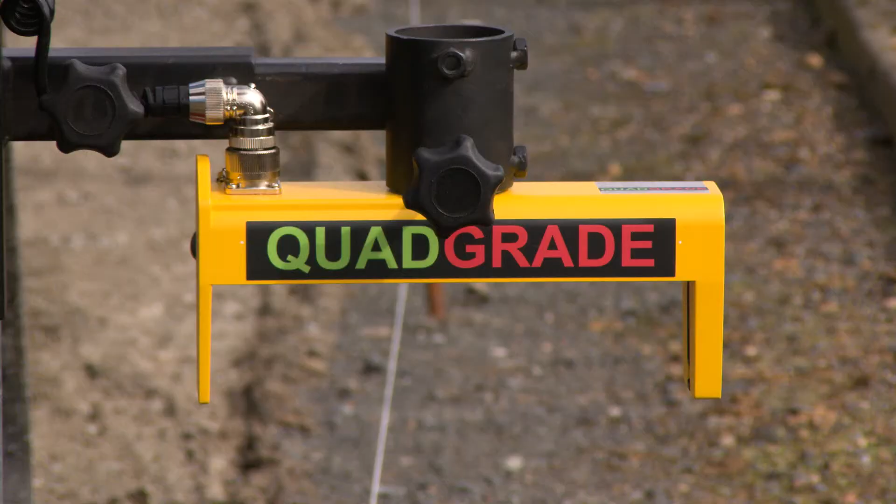Today we're looking at a sonic tracker and what it will do and how to set it up. Here's a sonic tracker, and it's designed for use on string lines or flat surfaces like already graded surfaces, or something like a lip of a curb. So it will set the height or elevation in relation to a string line or a flat surface.

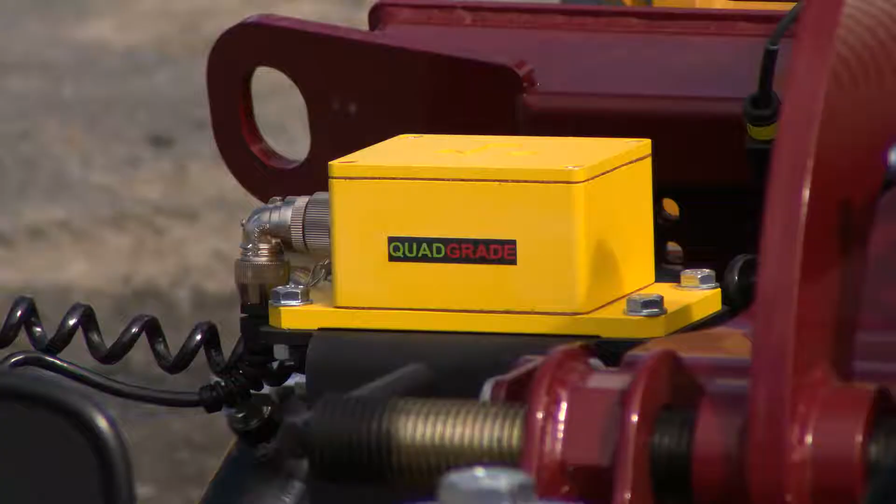And for the crossfall, we utilise a slope sensor. These slope sensors are gyro stabilised, so they're very stable and very quick, much quicker than a lot of others on the market. This allows us to follow a grade a lot more closely. So the slope sensor sets the crossfall, which you can adjust at any time, and the sonic adjusts the elevation. The elevation is adjustable on the screen, on the go, inside the cab.

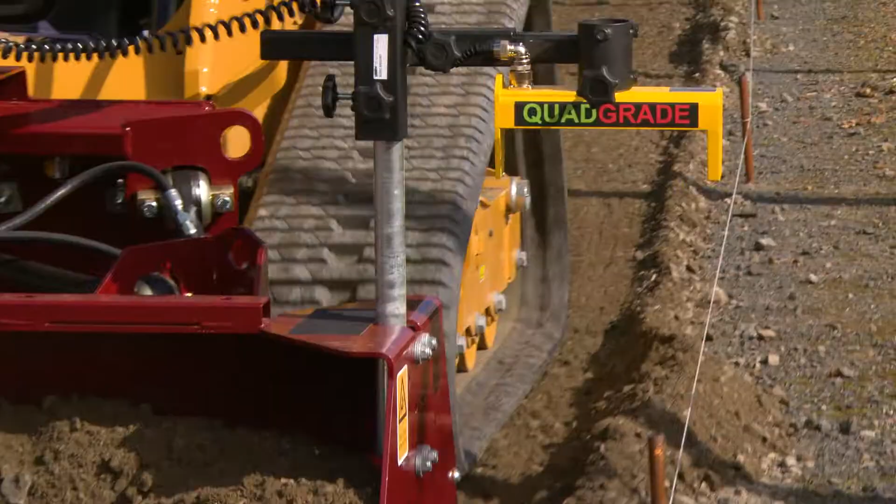So you can grade and alter the elevation up to 600 millimeters, which is 2 feet, on the go. But most of the time you keep it around 300 millimeters or 1 foot. It'll follow a string line or boxing formwork or a graded surface. So we're going to show you how to set it up and how it works.

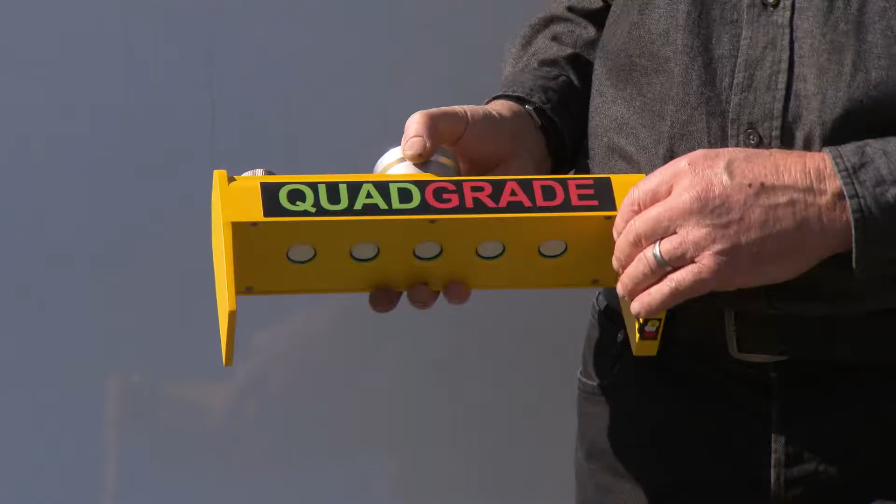What is a sonic tracker? A sonic tracker is an ultrasonic device that uses ultrasound to detect distance. And the QuadGrade uses 5 sensors. Some only have 1, we have 5. And what that does is it gives us a broader spread and greater accuracy.

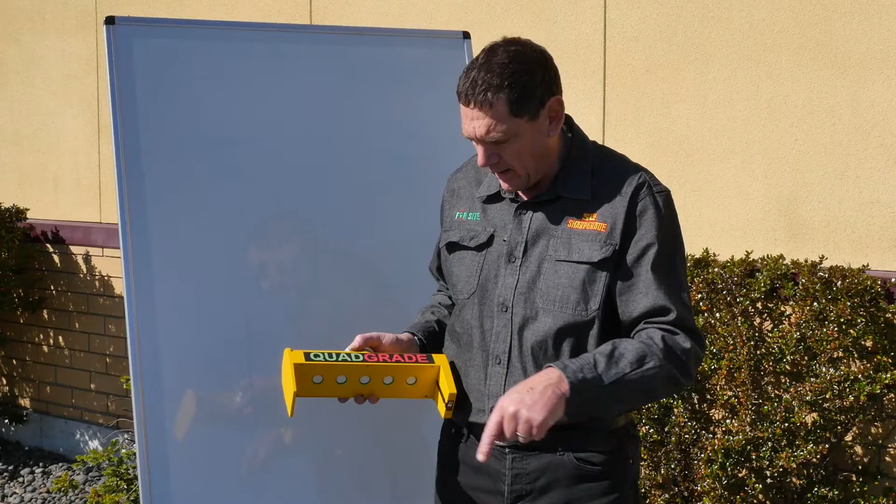So if the string is not exactly in the middle, it can pick up each sensor and know where it is, so it doesn't alter the accuracy depending on where the string is. So it's a very important feature.

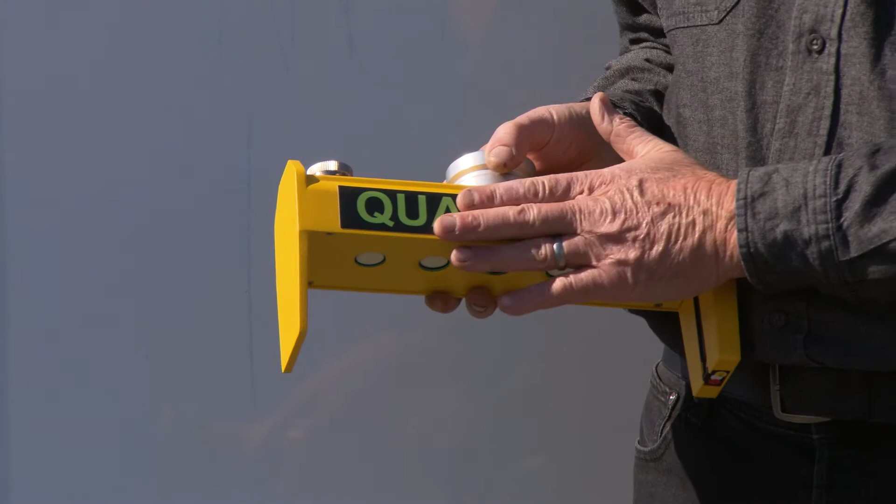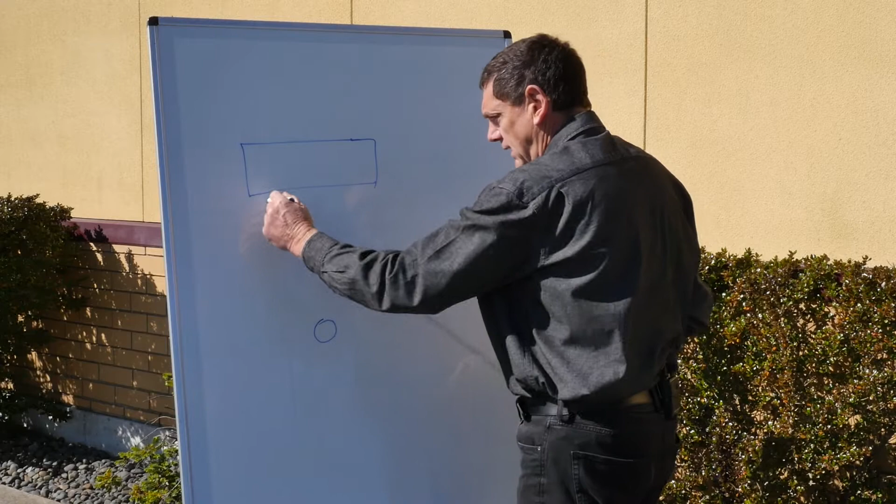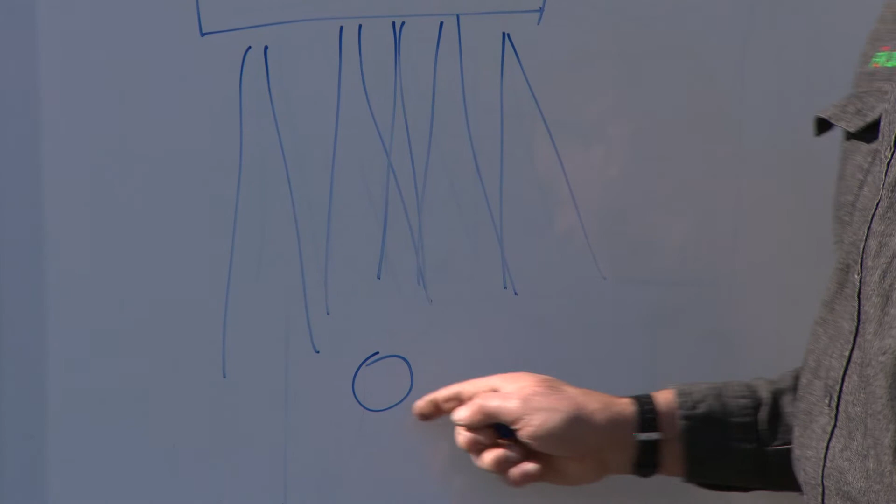When you go to use a tracker, there's some important things to understand to get the ultimate out of it. So here's our sonic, here's our string line, and we've got beams coming out, and I'll put a 5th one in there, okay? And they can pick up the string. Now, the string can move anywhere in this range. It can move 150 mils, 6 inches either side, and it will still maintain the accuracy because all of these beams will pick it up and detect it.

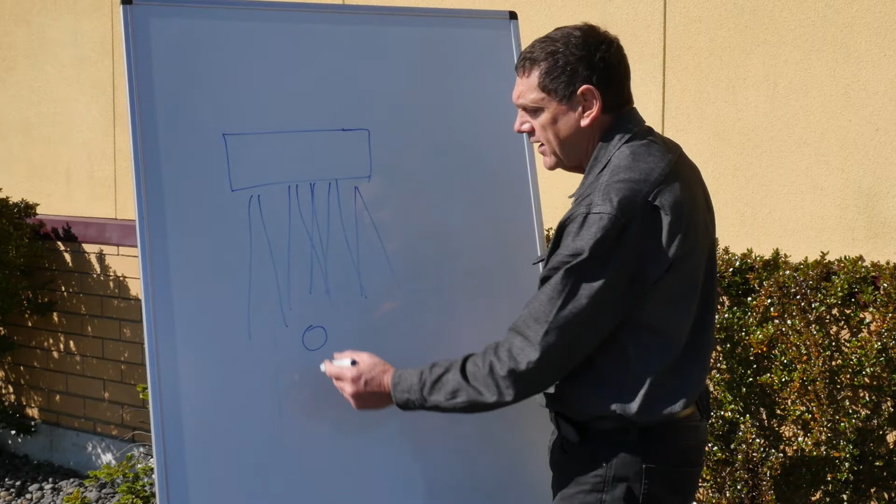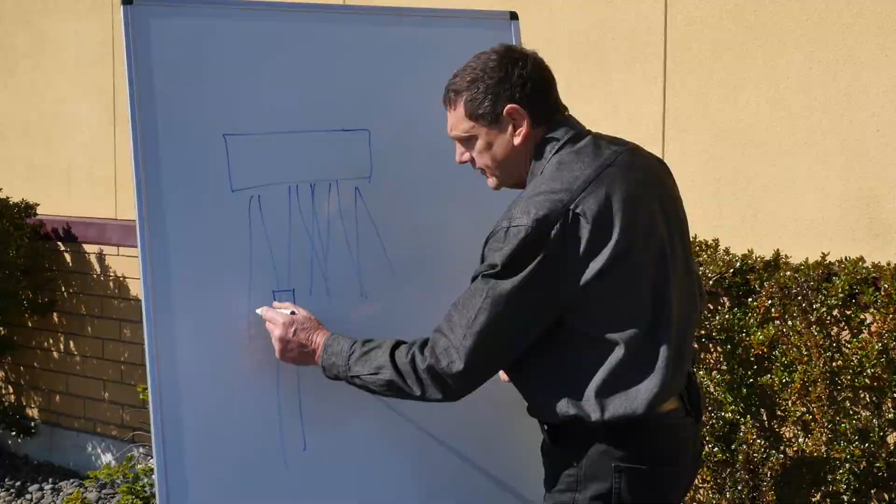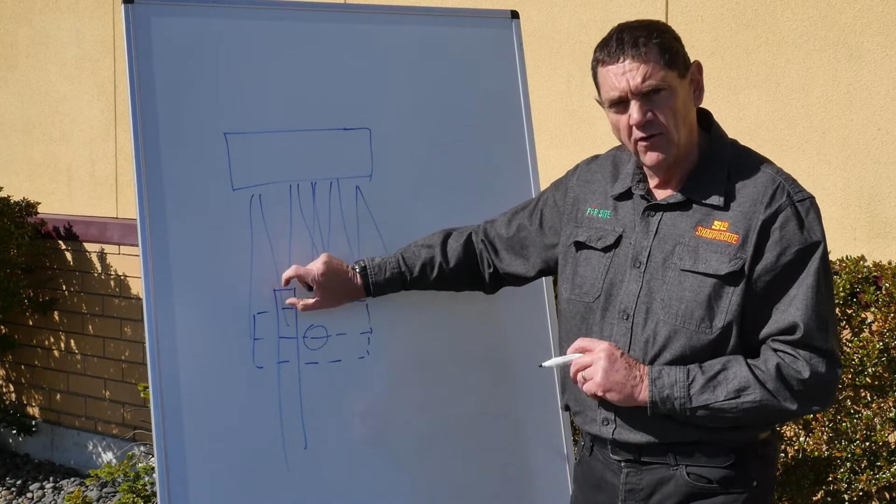But you ask, okay, what if I have a pin that I've got my string line on and it's going to interfere? Well, what we can do is we can set a control zone off the center of the string that anywhere in there we will detect, and anywhere outside of that it will not detect and will ignore. So that's how we do it. So we set a control zone, and we'll go through that in a minute.

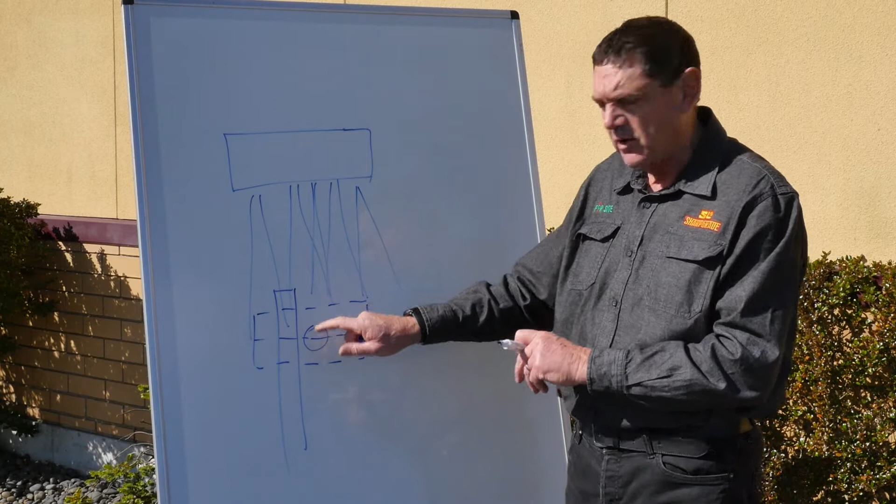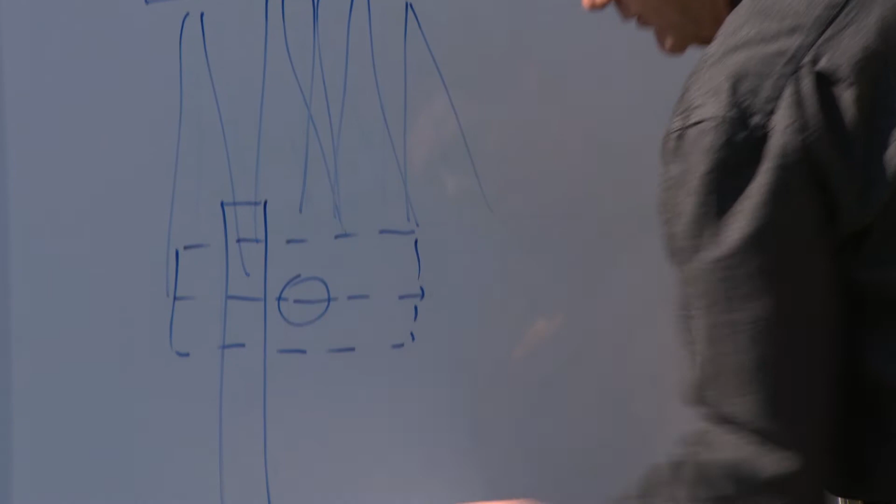And so all you have to ensure is that your pins or whatever is holding your string is taller than your control zone, and it will completely ignore it. And also, if your ground is down here, you've got to remember that the ground can't be in the control zone. So nothing can be in that control zone above or below the string.

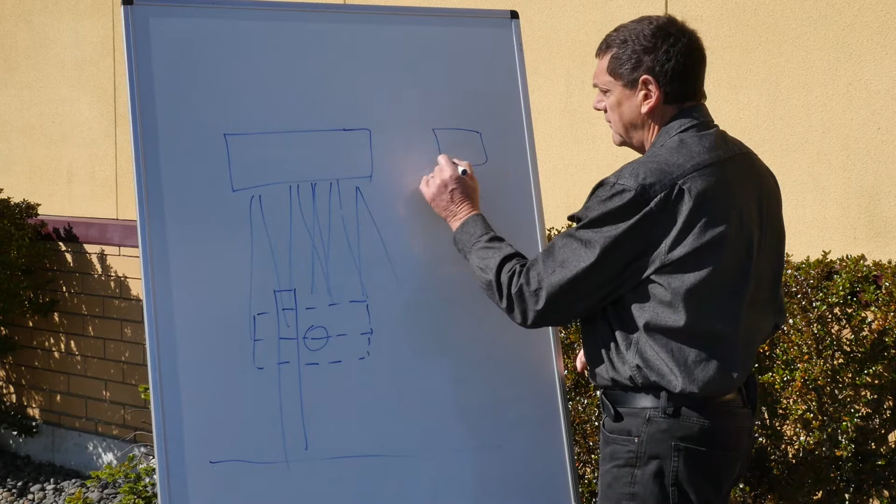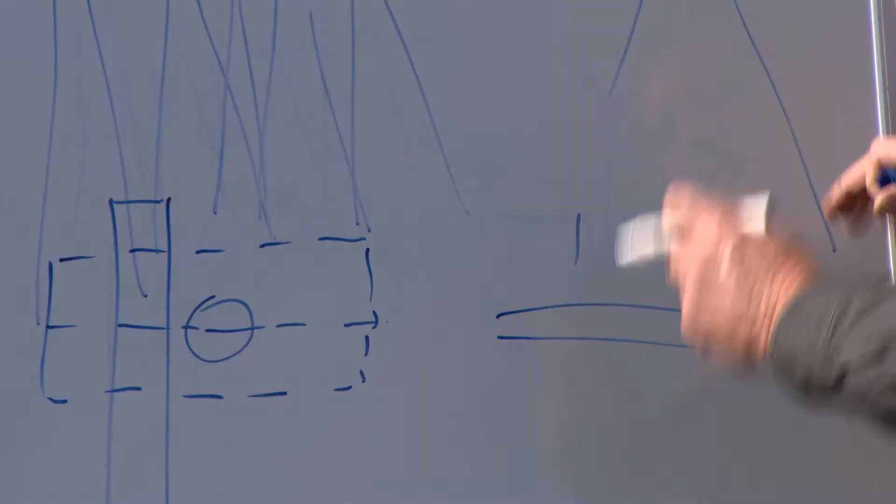Or you've got to remember that the beam comes out wider as well. So when the string is running along, we've got to look beside the string as well. Otherwise, if you have something beside the string, it's going to interfere. So those are the things that you just have to remember when you're setting up a sonic.

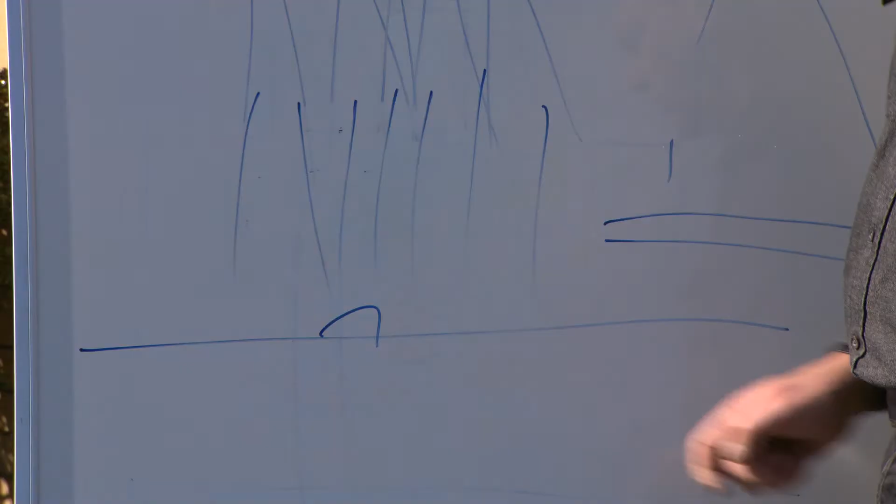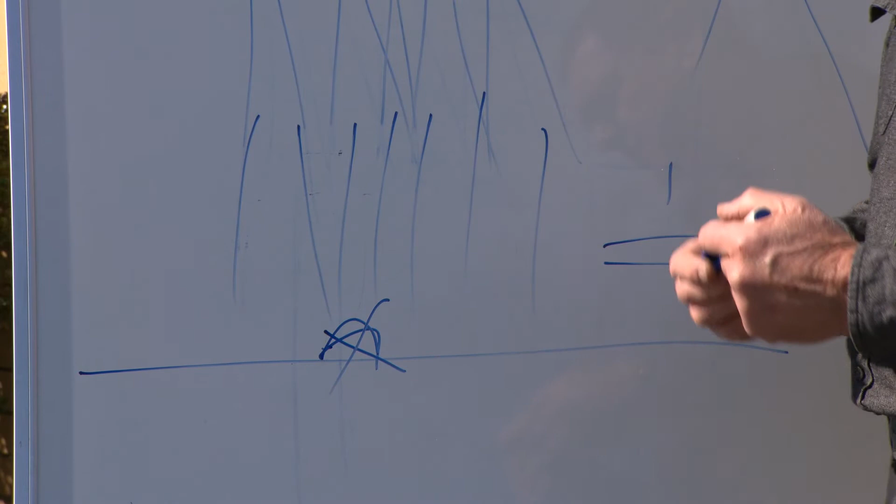Another thing with having multiple beams is that when we start running on a ground surface and we've got all these beams coming out and we get a stone, what we can do is we can look at all of these and say they're all the same, and we have one anomaly here, so we'll ignore it. So having multiple sensors allows you to have a very accurate dimension on a surface that is not perfectly flat.

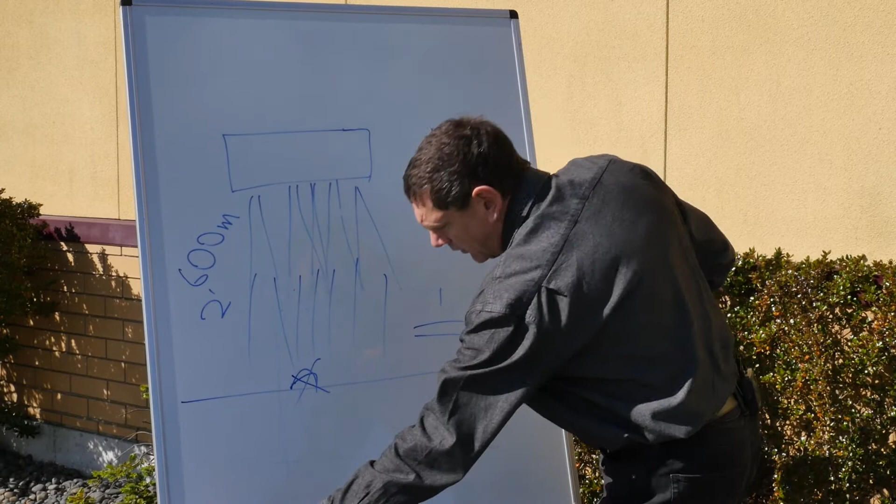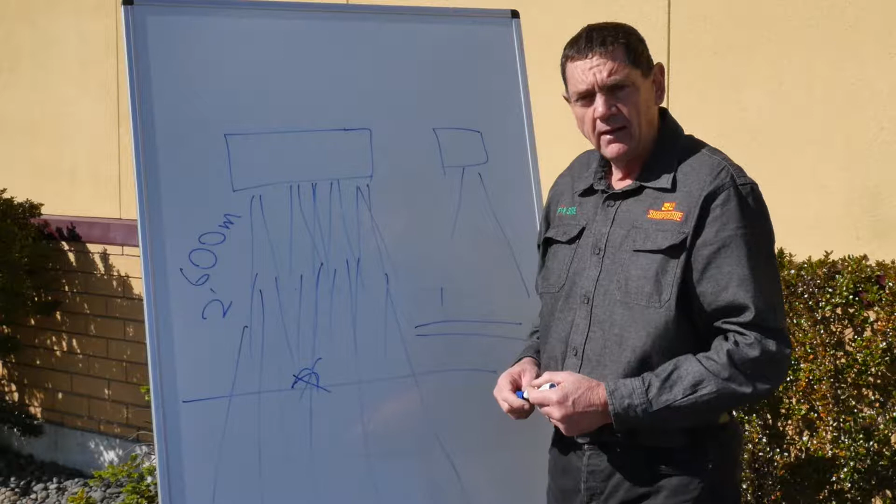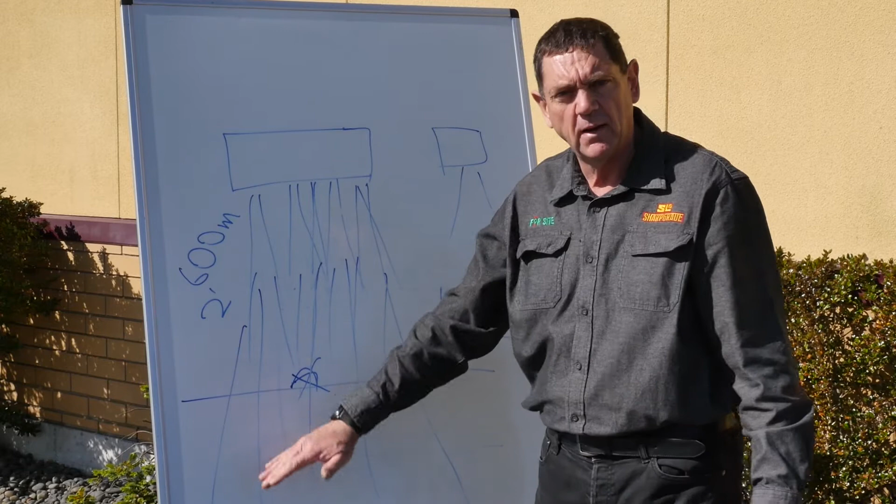The optimum range is 600 millimeters or 2 feet, 24 inches, okay? It will run bigger and smaller. It can run all the way down here. But what happens is your sensing window gets further apart and it gets more spread. Now, they still work, but if you keep them around 600 millimeters, 2 feet, that is the optimum. But you can go another 200 millimeters either side of that, from 400 to 800 millimeters, and they'll still work fine. But just remember, 600 millimeters is about the optimum. So that's what we're going to set at.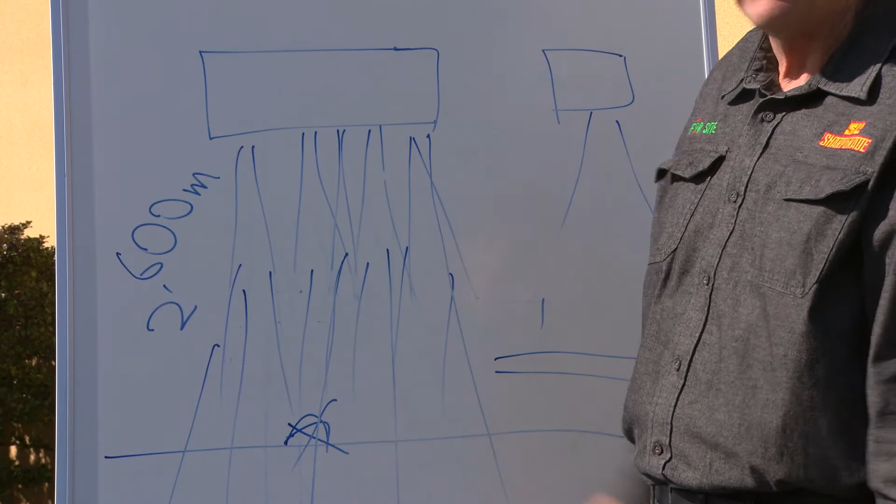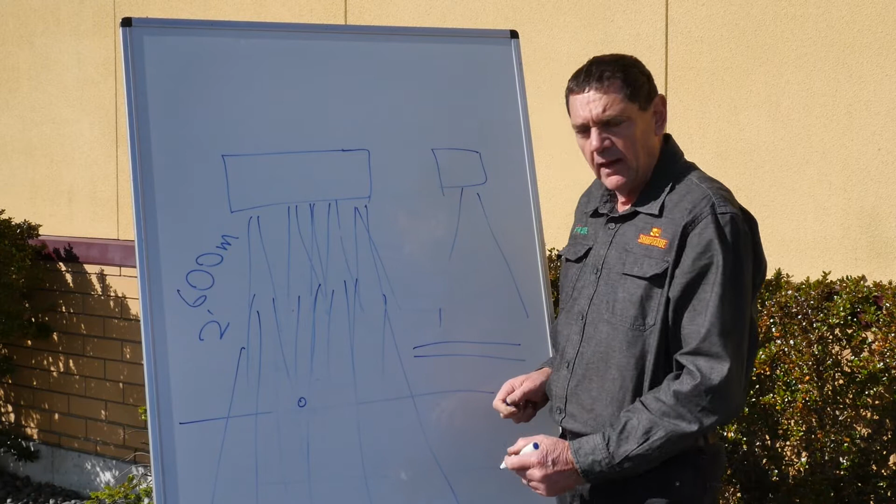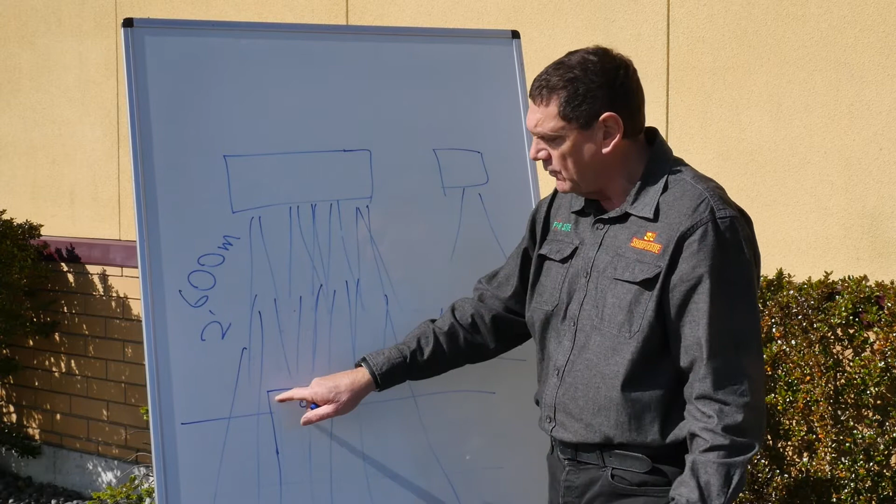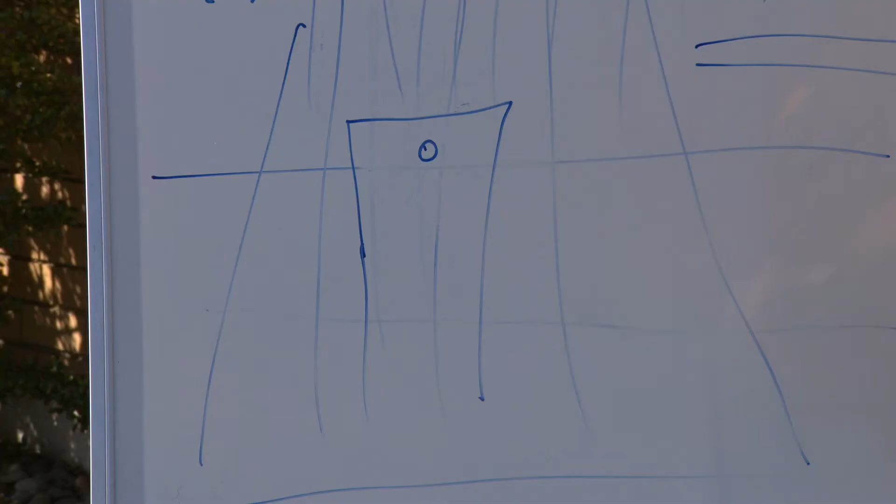Now, they will also sense off concrete boxing. So if instead of a string line, if it's got formwork, it will read that, and we can tell it that it's a string, and it will read, because we've got multiple sensors, it will read formwork and treat it as a string, just a very thick, wide string. So if you want to fit your boxing and then grade inside your boxing to suit the formwork, we can do that. And if you're doing something like a walkway or cycleway and it's been set up with 2 forms on each side, you can run another Sonic on this side and it will follow that perfectly.

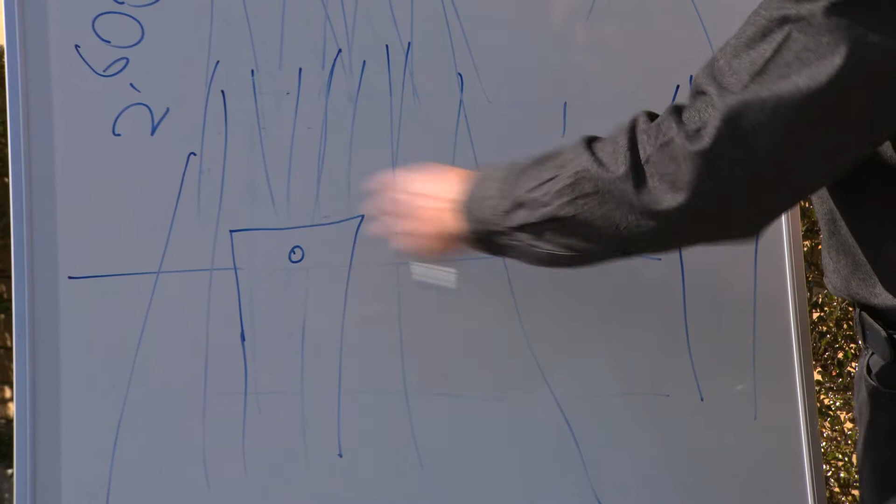Because we can have 150 mils, 6 inches each way, you set one up and follow that, and the other one will just take up the slack. So the Sonic Tracker can go either side on the SharpGrade. It's the only box grader in the world where you can set the Sonic up on either side, and that's because of the quad rod linkage, which doesn't have a center pivot.

So you set the Sonic up to the front of the blade, because that's the one you're going to be working with. And you can adjust it in or out by using these clamps and slide it in and out.

Normally you want the center to be around 300 millimeters, a foot out. You can run it closer, but you have to be careful that you don't start registering the side of the box, or when material spills over the box, it can start influencing it. So you normally set it at least 300 mils off the wing.

The optimum height is around 600 mil or 2 feet, 24 inches off your string or off the surface, and you can adjust that height by sliding it up and down the pole. Very simple to install - it just slides down the pole and then you clamp it up, and it doesn't have to be perfect. If it's within an inch, it doesn't matter, because this thing's got so much range - you've got 8 inches of range either side.

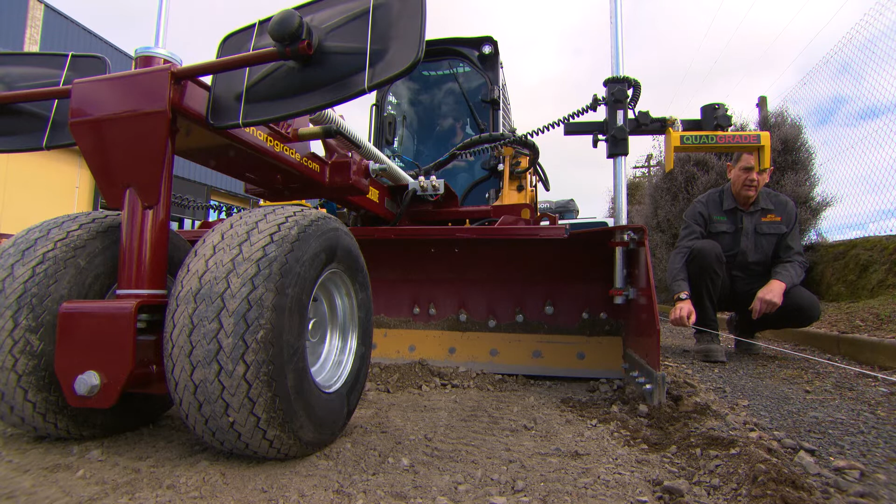The Sonic will respond to the string line. As the string line is moved, or the machine moves in relation to the string line, the Sonic will keep a constant height. Because it's got multiple sensors, it does not have to be on the center line to maintain correct height. As we move the string, it will tell the operator in the cab which way to move his machine to maintain center line of the string.

So it's very responsive. As we move, you can see that we're moving off the string, and I can just move the machine and it will tell me when I'm back on the string. If I overcorrect, it will tell me that I've gone too far the other way, and I'll come back again to the center. As the string line goes up and down, it'll tell us where it's going and what it's doing, so it's all automatic.

You don't have to do anything but just keep it in the center of the string. Very easy to drive and to control.

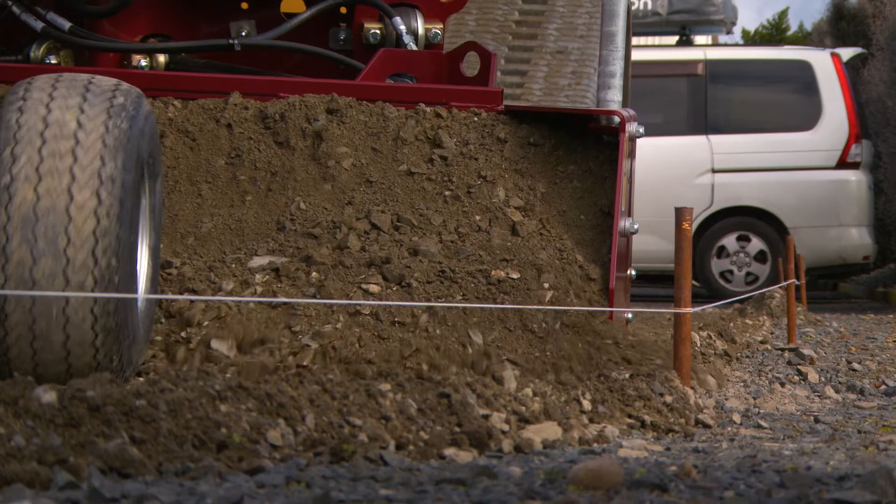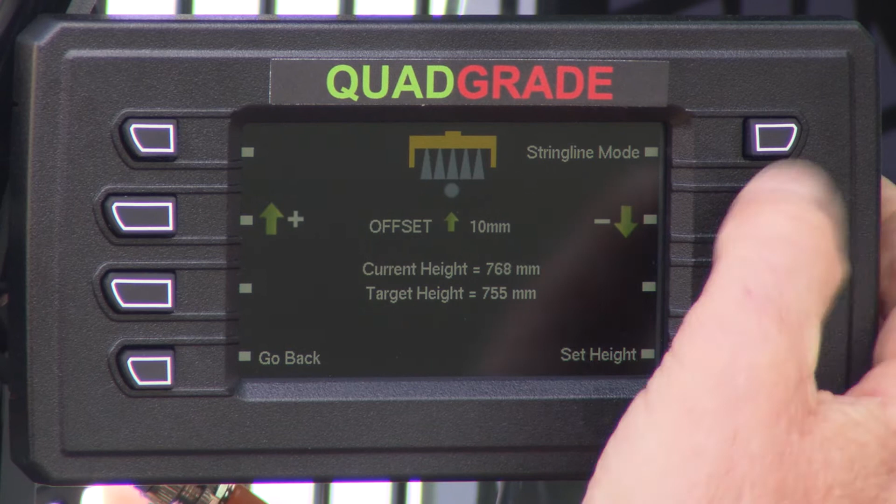We can adjust the grade height while we're grading by pushing the setting button and then adjusting the grade height, and it will raise or lower it on the fly. Then you can go back and it'll tell you on the screen how much you've offset the grade height. You can also manually override the grade height by pushing the buttons on the joystick and letting them off - it'll go back to grade.

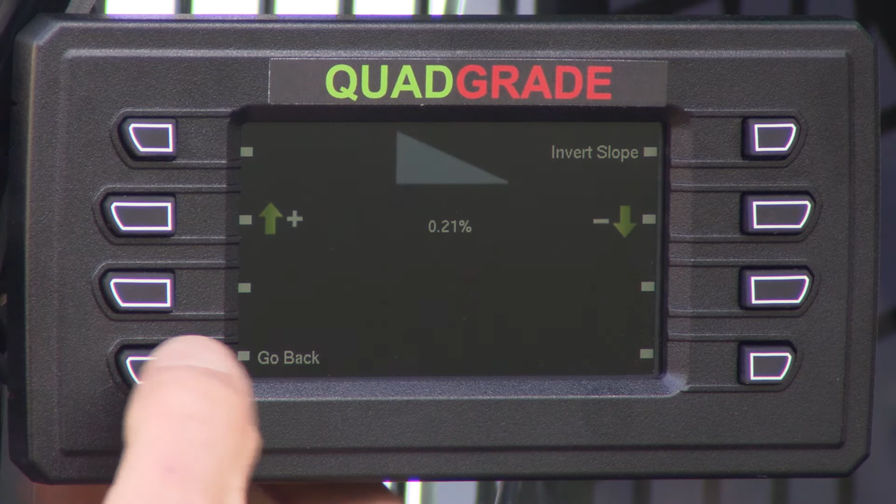You can also set the slope or the crossfall by pushing settings and then adjusting it up and down to whatever you want. It will adjust on the fly and then reset, and you can override it at any time.

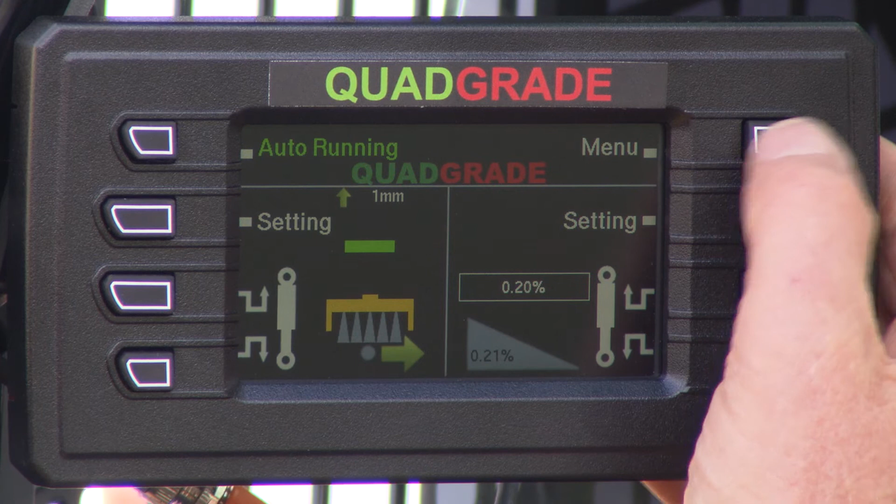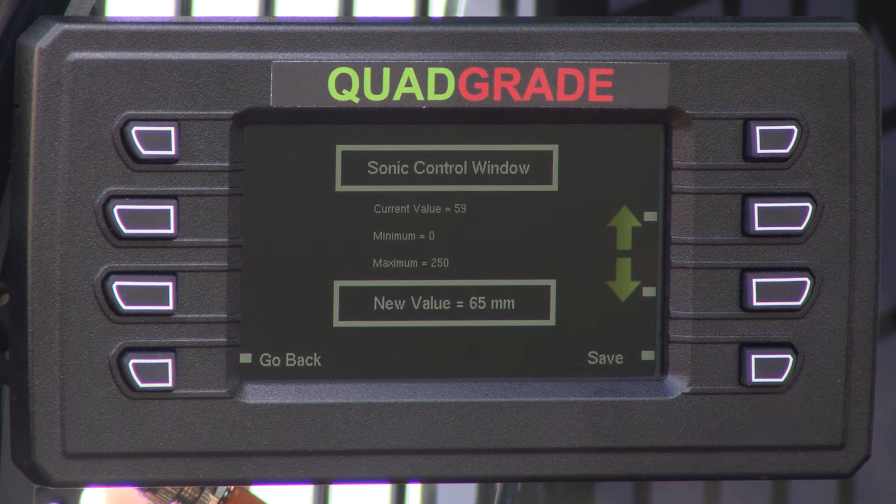When you want to adjust the Sonic control window, you select Menu, Adjustments, and then Sonic Control, and you select to adjust, and then you adjust it up or down. The wider the window you have, the more latitude you've got to get off the string. But remember that the Sonic control window has to be smaller than the height of your pins, otherwise it'll affect your grade height. Once you've selected that, you press save and then go back and away you go.

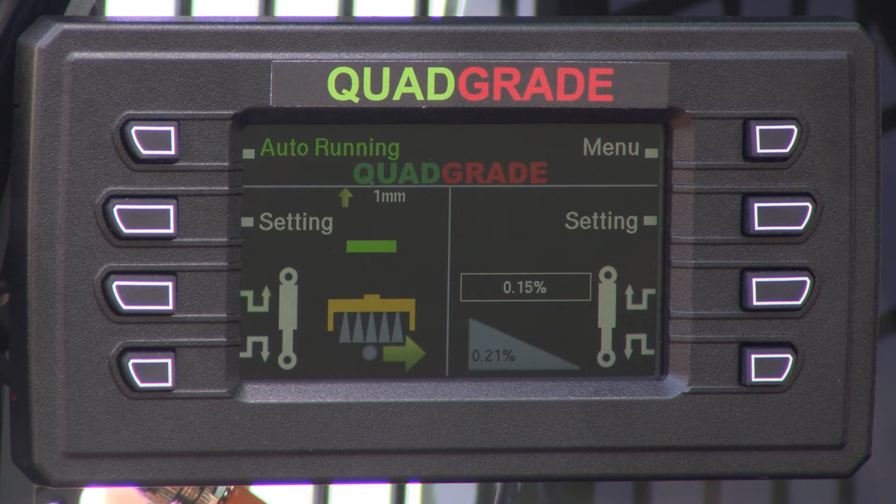So everything's automatic, you don't have to do anything. You've got full control of your grade height and your crossfall. Very simple system to use.

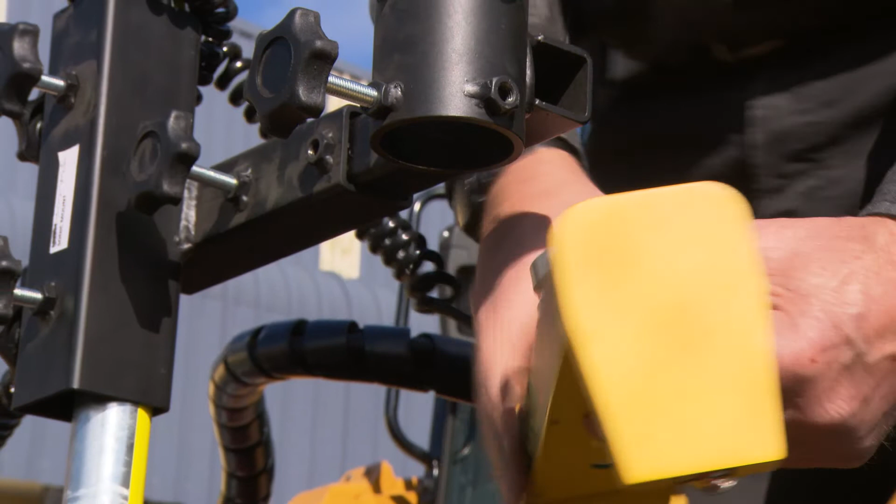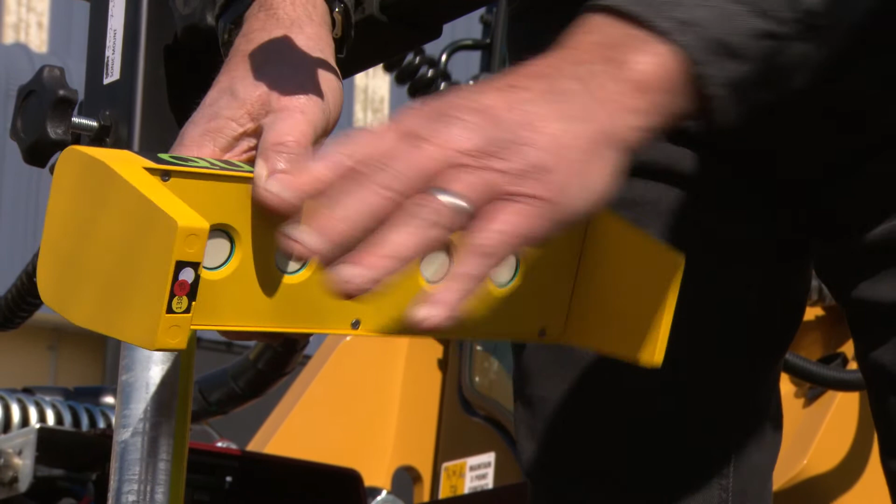When we go into ground mode, we turn the tracker from parallel with the blade to laying perpendicular to the blade, and this allows the sensors to sense a wider path, which means it can take out any anomalies in the surface - so stones and undulations are averaged out.

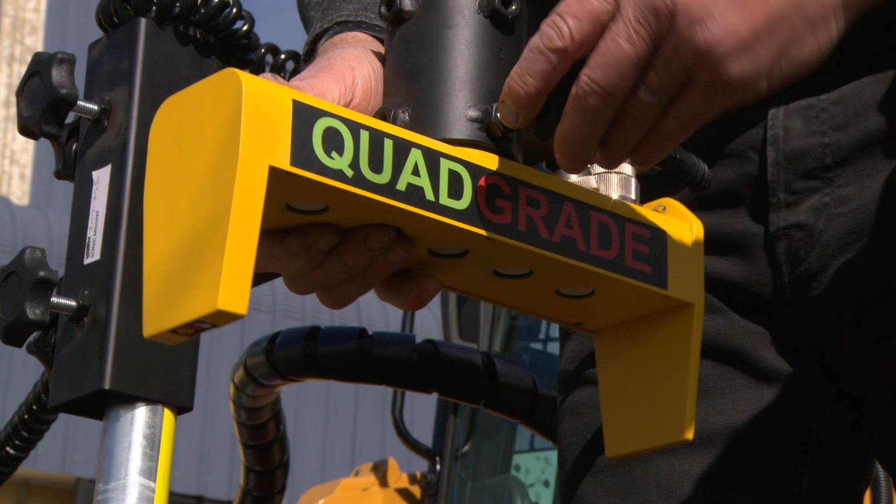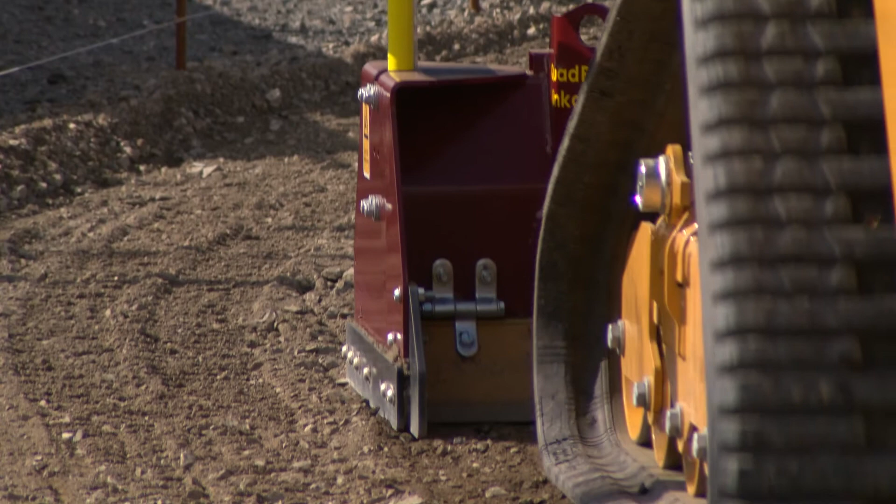We just place the sonic tracker perpendicular, lock it up, set the height, and then start grading, as simple as that. It'll grade off the surface, so that allows us to transfer the same grade over and over again. You can do a wide section of driveway or road off the same setting, and it'll all be seamless, so it'll grade match.

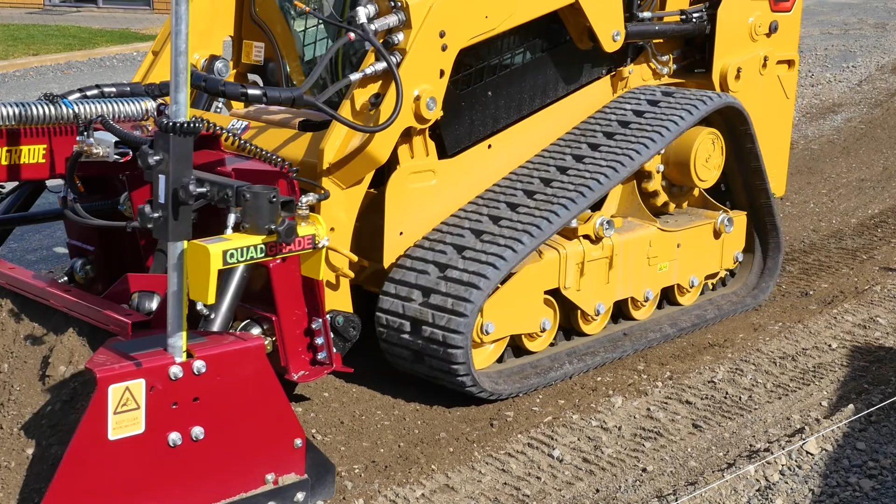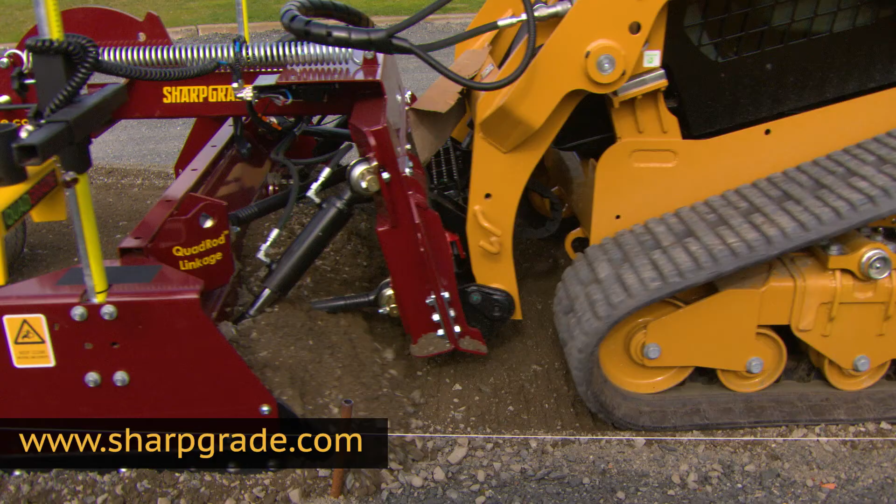Very simple, rugged device that's really popular for doing curb work, gutters, sidewalks, walking tracks, cycleways, that sort of thing. Very effective. If you want any more information, go to www.sharpgrade.com.